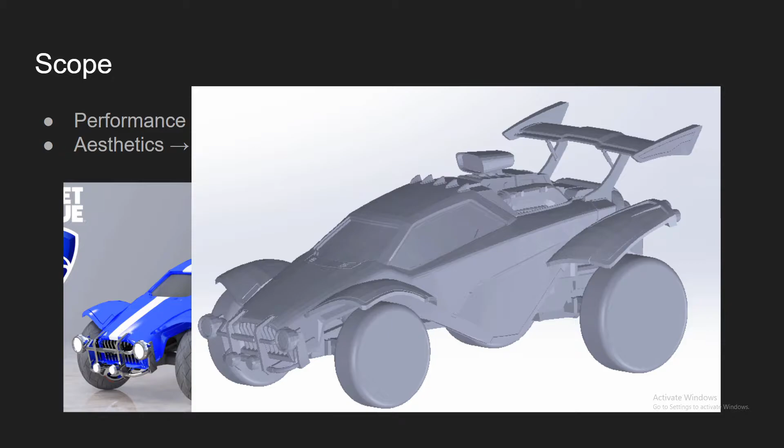So I guess for the boring part, and here's the fun stuff. Just some actually decent looking fan art that people had made. Yeah, the goal is just to make it roll. Buy as many purchased parts as possible that can be used and cut and pieced all together, and then have an actual body that looks the part, at least.

I did get a model from the actual game and drew a Percy, if you will. I named this one Chad instead—I thought it was a better name than Percy. The one that's in there is the quote-unquote 6.5 scale, which just means nothing.

That torso height is like 19.2, and so then it was just scaling that relative to the size of the car rather than scaling the car and the model to a sketch. But I did that for a whole bunch of different options you can see on the Excel sheet, and that just gave different wheelbase, track widths, all that good stuff.

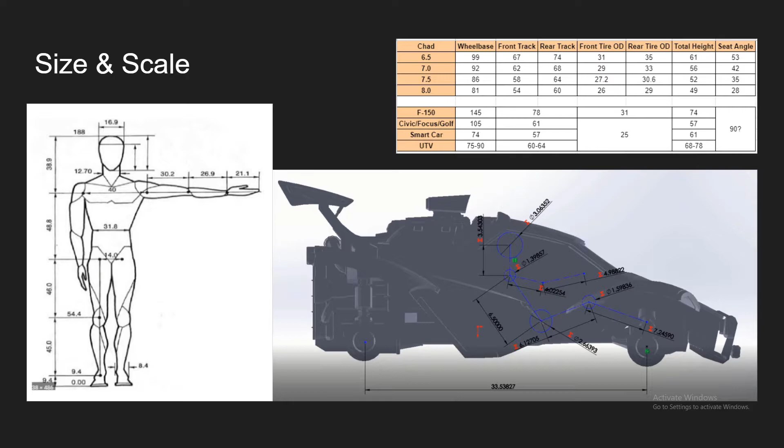Yeah, it's still like a full-size car even though it's a single-seater, because you can't move the head that much farther back in the window there. I pretty much kept the head in that same spot when I scaled it. I think I've got the 7.5 picture in here too.

And there's like nothing else you can do with the back half of the vehicle. It's set aside for this massive powertrain that it isn't actually going to have. Are you just going to put an engine cover on it to make it look like a V8? Yeah.

Yeah, everything outside—I'll show you the main body section, it's on another slide, there's a picture of it—but anything other than that is just going to be in the chassis underneath. It's just going to be there to look the part, just to cover it, like you said.

You weren't privy to these conversations before, but initially one of the options was to try and just use a transaxle, except it poked out—it was too wide. The actual center part of the body is like 32 inches tops. One option was to take that, turn it 90 degrees, and then put CV axles to a new rear differential in order to get it to fit within the profile of the vehicle.

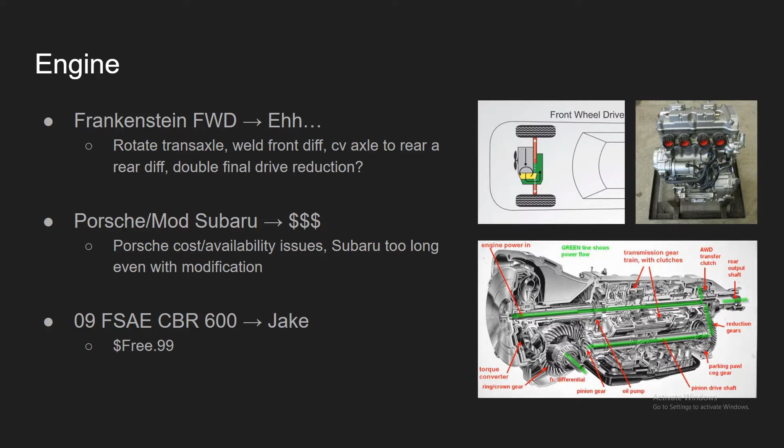Anyways, I was looking at if you use the bike, the Frankenstein impossible idea. I was looking at a pre-2015 Mustang which had beam axles in the rear still, and your Wranglers still have them too, but that's not going to work for pretty much any of them.

So if the idea at that point was to use the CBR, it would still be an independent suspension, and for that I was looking at some cars, but the control arms aren't long enough to actually span the distance to the center of the vehicle. So I was either going to have to use something off of a truck. I actually measured up the suspension on my F-150 and overlaid it in a model. I'll show that in a sec.

Or use something off of a side-by-side. But the problem with those is that they're actually too long, because your feet are going to be between your front suspension and all that. On most side-by-sides and off-roaders, where it connects on the frame, it seems like a foot wide in most of the pictures. Let me see if I got something... there you go, it's a little bit better.

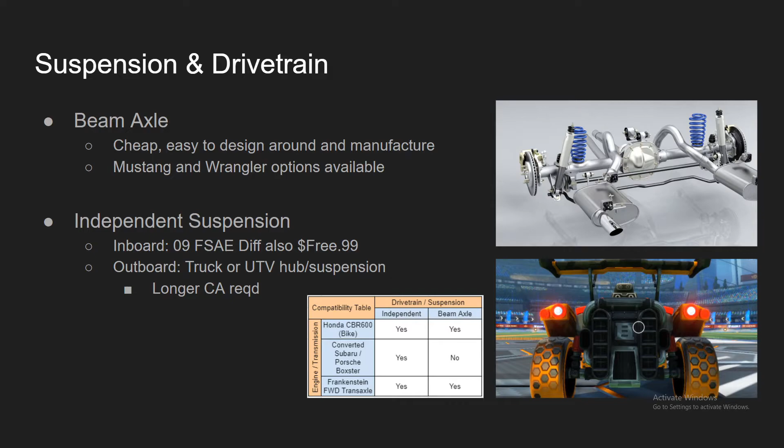Is it gonna have power steering with your 27-inch wheels? Not really planning on it. Wolf: just gotta start rolling forward before you start steering, that's all it is. Yeah, I think you're probably just gonna have to weld in some bungs and make some shit.

I do think the F-150 suspension will fit. So I'm hoping to not have to go the route of making custom A-arms and all that. I'm hoping that if it visually looks close enough, that's the route to go. There's actually a salvage yard just down the street that has the same year and model truck as mine. I took the measurements off mine for a reason, because I could go down there and get scrap parts, then use them to actually model everything up, and use it as a jig for welding brackets on a frame.

What is your chassis, your frame? Oh, I'm glad you asked. Oh God. I drew that up like yesterday, and it's got some good triangulation, as you can see.

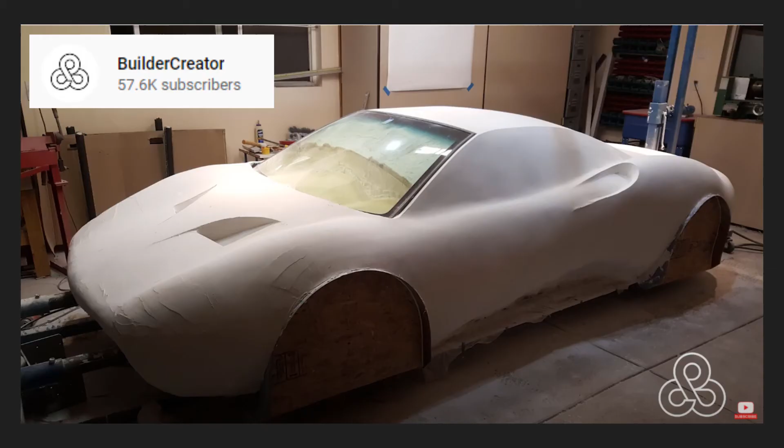Yeah, how are you gonna make all the body work? I had a coworker that sent me a video of this dude on YouTube, a prototype engineer, who had done stuff before using basically plywood station lines, filling it in with burlap, then coating all of it with drywall paste, sanding it down to final dimensions, and then took molds off of that. It was a pretty cheap way of doing it, but dear God, did he have an unfathomable amount of time in just sanding things and taking measurements between the two sides to make sure the car was symmetrical. Yeah, I'd imagine.

I was thinking about something. The body isn't that large - or not that large, it's like compared to 3D printing scale though, it's massive, right? One thing I was thinking about was 3D printing sections and doweling them all together to get the profile, and then you can sand and fill and do everything from there. You're gonna have to break it into a whole bunch of basically foot-by-foot sections that you can put features in, dowel pin holes, and dowel it all together to make that singular structure.

Or if you split it up ahead of time, you can basically do the same thing, but break up where your panels are going to be in all of your different segments. You could break that up ahead of time and save some material, make it a little bit easier that way potentially.

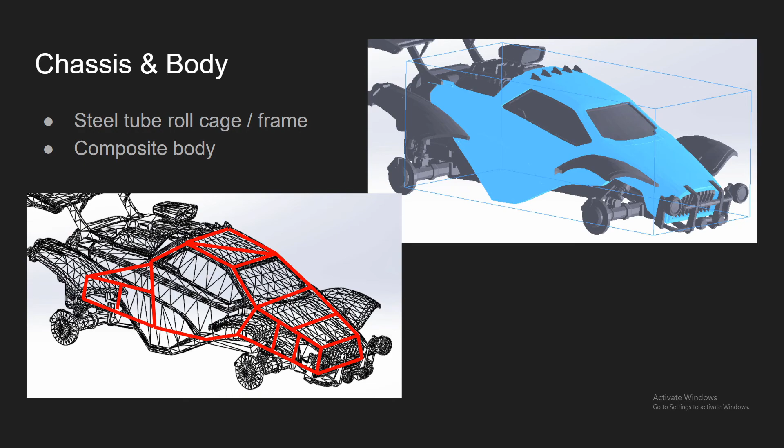The structural engineer in me, like I said before, it'll be all right. Nobody starts a project saying, 'Yeah, this is going to go fucking terrible.' Yep.

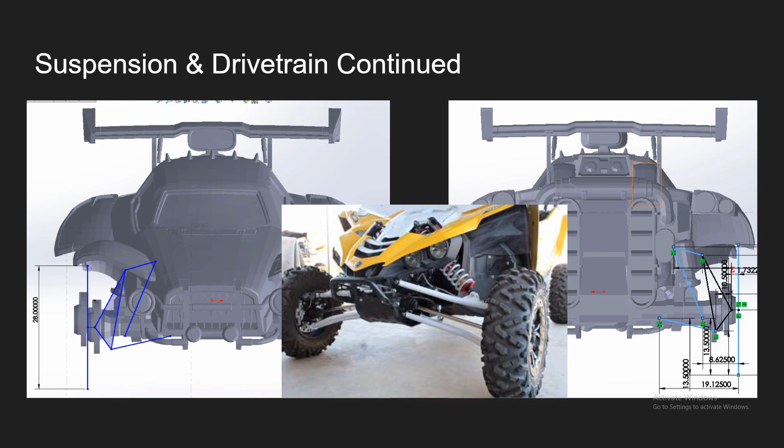Are you going to bring it to MIS for Formula 2021? I would take it to like local track days and stuff, I don't think it's gonna pass tech inspection. It has a roll cage. It's an F1, it's a shortened and narrowed F-150 with a roll cage. Except that's not going to be using the F-150 chassis because reasons.